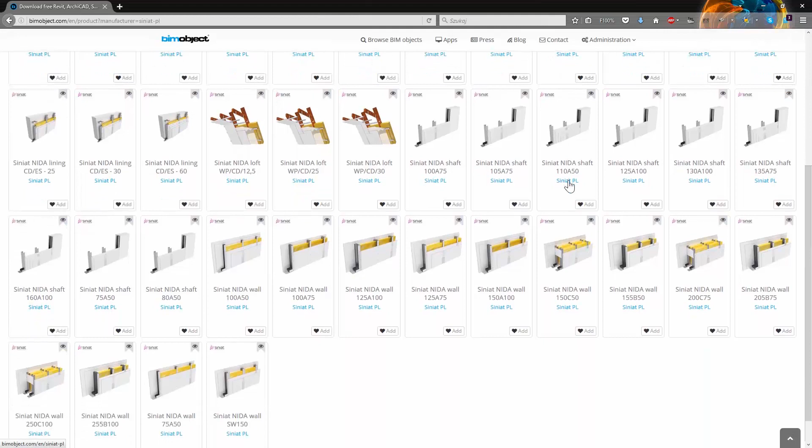Now I'm able to see all Siniat PL products available on the portal. I will choose one example wall, this one 100A75.

Here is the product page where you can find some information, description, specification, links, classification and other data. We also prepared some nice 3D previews of these objects, so you can click the 3D button to see how exactly the object looks.

Let's start with ArchiCAD. As you can see, we have 4 ArchiCAD files, LCF and GSM with the detailed 2D drawings, and 2 AAT files containing the 3D structure of the wall.

Right now I will download the AAT files. It's extremely important to download both the Siniat PL additional attributes AAT and also Siniat PL NIDA wall 100A75 AAT.

Let's download also the second example wall. I need to go to the Siniat PL products again, and this time I will choose this one, 150C50.

As you can see, this wall also contains 2 AAT files, but I already downloaded the additional attributes file, so it's enough to download the second one, 150C50 AAT.

Let's go back to our ArchiCAD project. You need to select Options, Element Attributes and Attribute Manager.

Then you need to select the All tab on the right side, click Open, select the Siniat Additional Attributes AAT files which you downloaded from the portal, open it, select all elements in this table on the right side and click Overwrite.

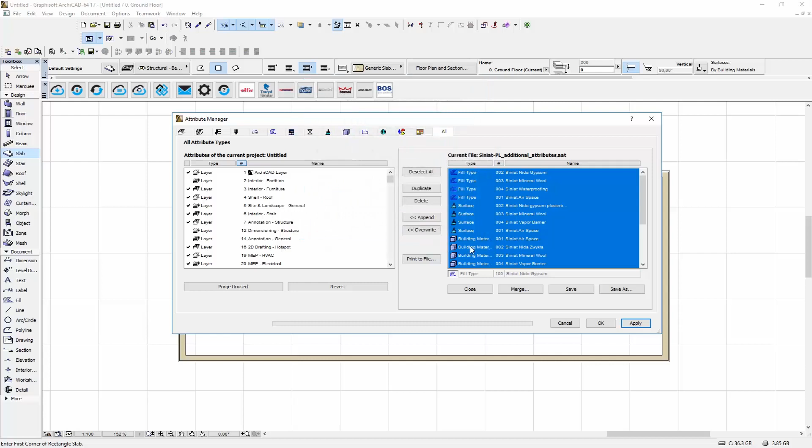Please remember that it's crucial to use the Overwrite option, because otherwise those objects won't work properly.

Let's import the second file containing the wall structure for the 100A75 wall. You need to open this file, select all attribute types, click Append, Apply and confirm with the Create button.

Now we can close the Attribute Manager. Let's go to Wall Settings and check if the walls have been imported correctly. Yes, you can see that here we have some predefined Siniat NIDA walls.

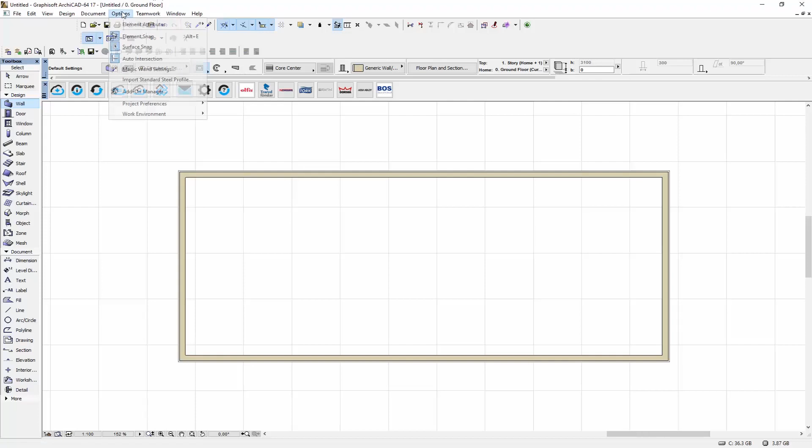Let's repeat this import process for the second wall. For the 150C50, you need to again locate the file, select it, highlight all attribute types, click Append and confirm with Apply and Create button.

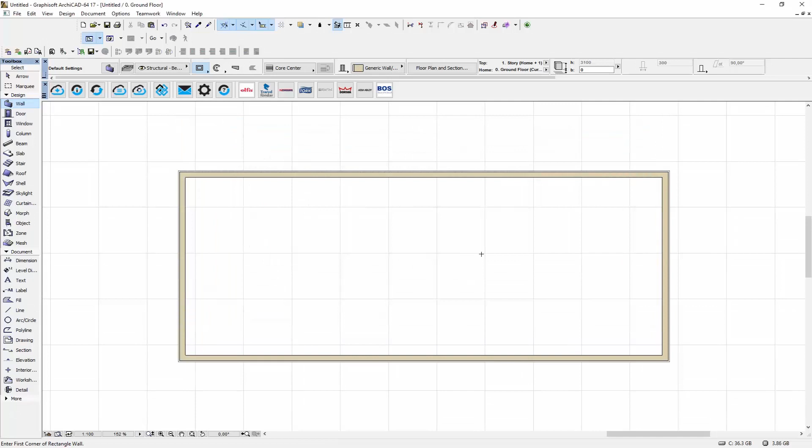Now let's check again if the wall has been imported properly. Here you can see we have different types for the 150C50 and 100A75 walls.

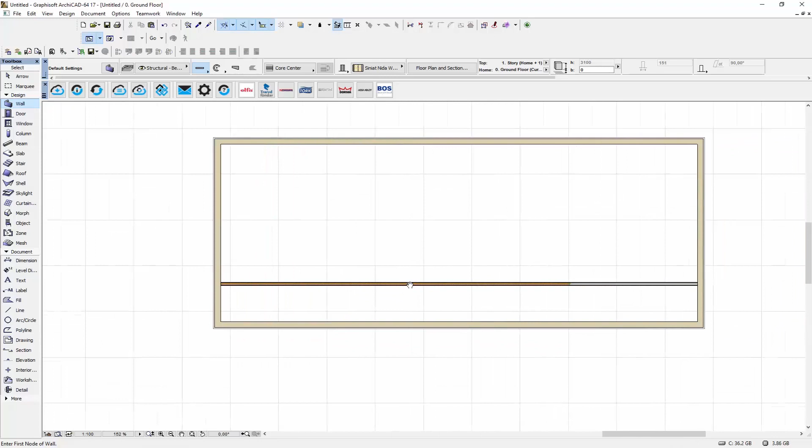Now let me draw some internal walls using the imported structures. So here is the first one. Let's select it and change its type to, let's say, 100A75 Expert.

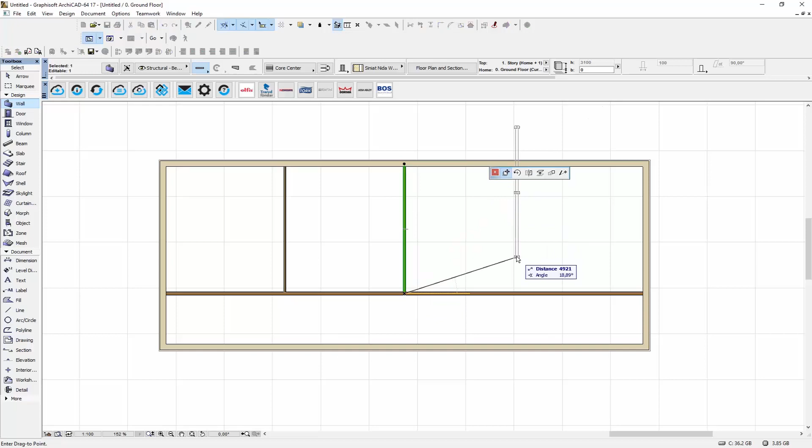I will draw some additional internal walls, one in the middle, copy it to the left, and the third one on the right side. If you would like to see the connection details, you can always zoom in and see how it looks in the corners.

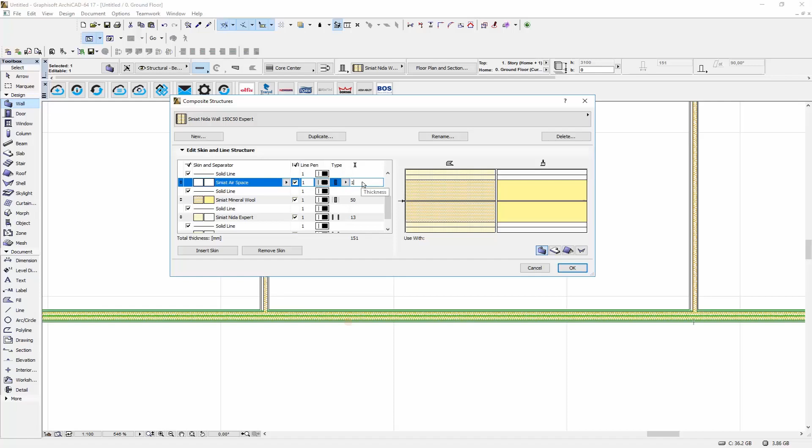Also you can modify the structure of the wall by changing the thickness of some layers. You need to select the composite, select the layer which you want to change. In this example, we change the airspace from 1 mm to 100 and confirm with OK, and you are able to see how this wall looks with the bigger airspace.

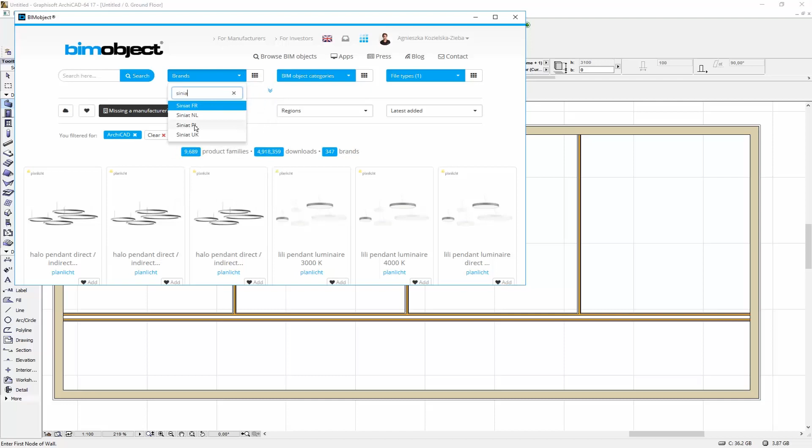For some Siniat systems, we also prepared for you other objects which contain detailed 2D drawings. I am using my BIM object application for ArchiCAD to locate those files, so I need to select the wall and download the LCF file, and also repeat this process for the GSM file for the same wall.

If you download more objects, you don't have to download LCF again. It's enough to download it once and have it somewhere in the library.

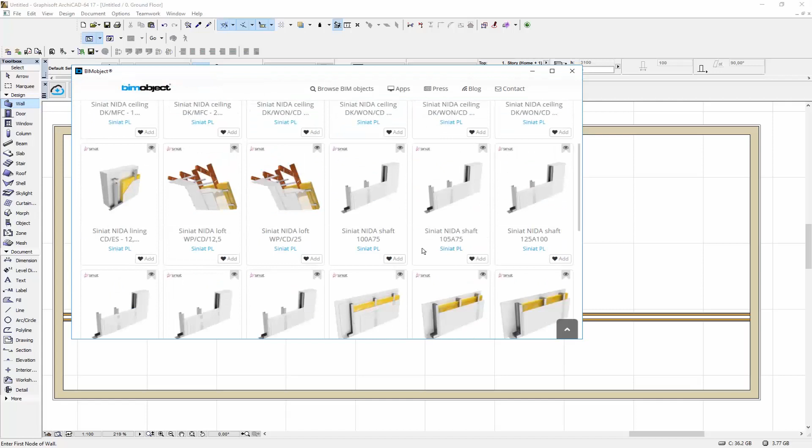If you downloaded both files, you can go to Object menu and select this particular object from the library. You can modify its properties by changing the detailed drawing in the General Settings tab.

You can modify the color in the Appearance tab, and you also have some links to the manufacturer's website in the third tab, Product Pages.

Here is how it looks on the manufacturer's website. And in the last tab, you have some social media links and some BIM object information.

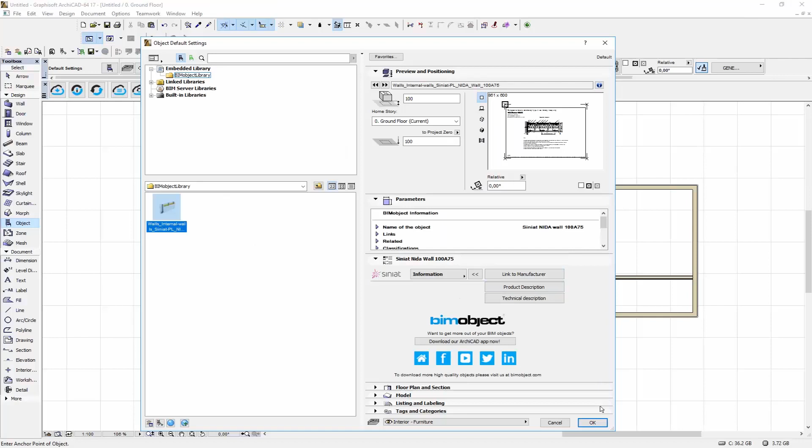If you place the drawings in your project, you can see the connection details, some additional information, and cross-section of this wall. In Revit, you can import predefined walls from the BIM object portal, or you can choose a more convenient way and use our BIM object Revit application to download them directly into your project.

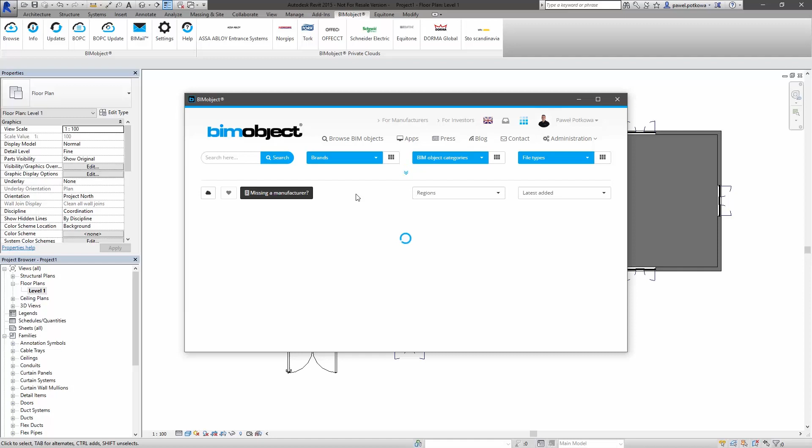I will choose the second way. Click Browse button, filter the content on the portal again by typing in the brands field Siniat PL name.

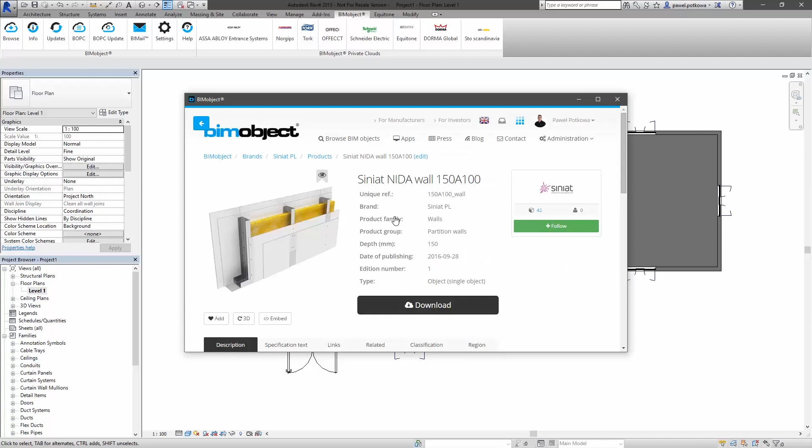And here we have our objects. I will choose one example again, this one, 150A100. You need to click Download, select the Revit file, and wait a second until it is downloaded into your project.

After the download process, Revit opens the walls in a separate window. Here you can see some 3D layer structure of these walls.

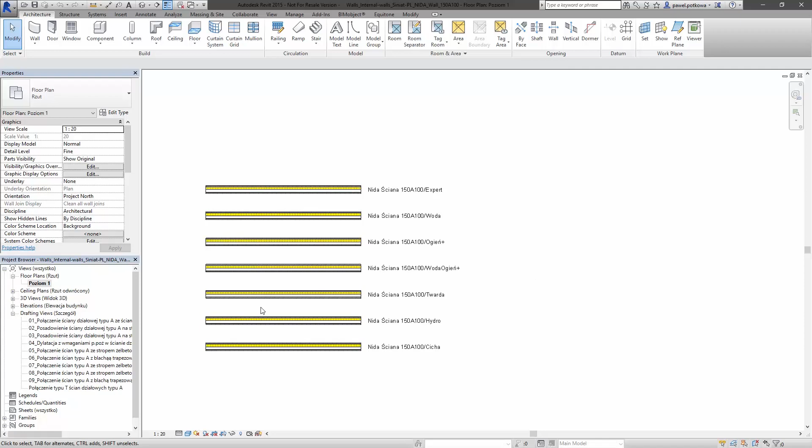You can also switch to level 1 to see the details in 2D, and we also prepared some detailed drawings with the cross-section and some connections of these walls.

If you would like to import these walls into your own project, you need to switch to this project, choose the Manage tab, and select Transfer Project Standards icon.

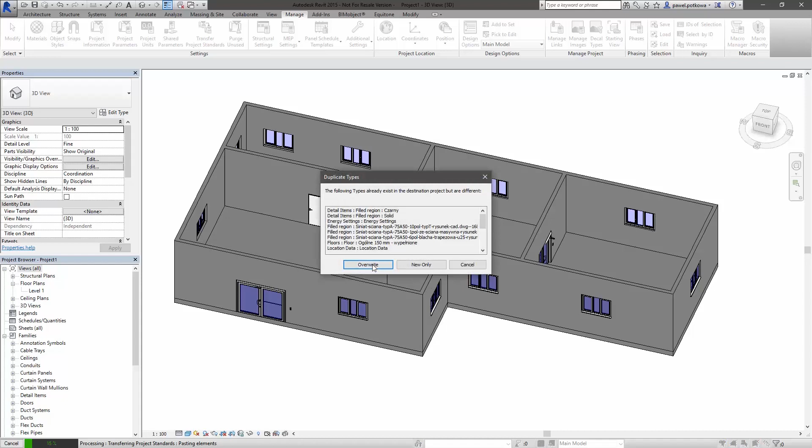Now you need to select the project containing the standards which you want to copy, check all, confirm with OK button, and you need to press Overwrite to overwrite the values which you have in the current project.

If you want to change any of the walls which you have in a project, you need to select it, select Properties, and switch it to another type.

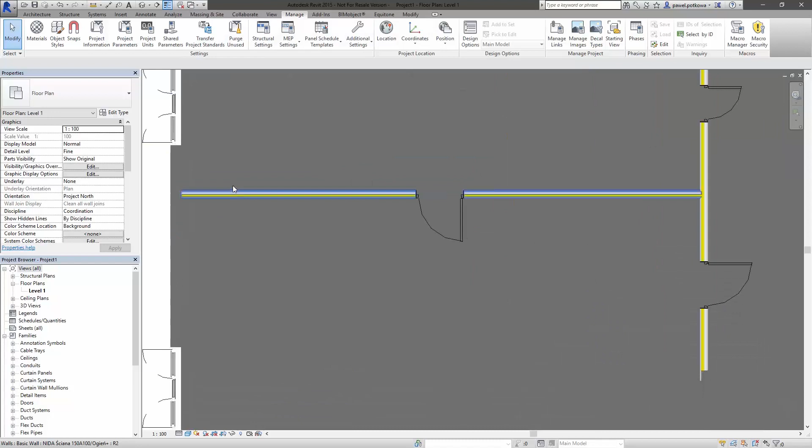Let's repeat this process for some different internal walls. In 2D you are able to see some details of these walls, layers, and some connections between them.

If you want to get more information about these solutions, you need to select the object, choose BIMobject tab, and press Info button. Then you will be able to see the product page and get some additional information about this solution. That's all for today.